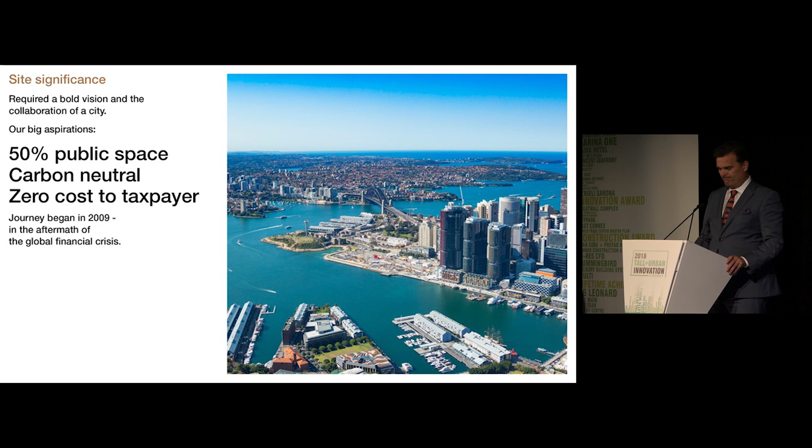We returned 50% of the site to the public. We had to be carbon neutral and deliver the project at no cost to the taxpayer.

International Towers Sydney was a commitment to add 3 million square feet of premium space, 137 floors, a 42% increase to the existing market. We had to create towers that the city would embrace and that would allow businesses and people to thrive. Failure wasn't an option.

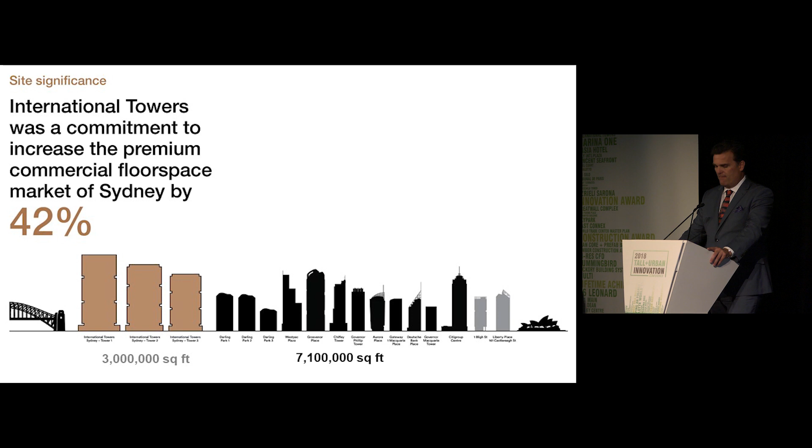So we asked ourselves, how would we succeed? How do we develop buildings that people will thrive in? Quite simply, how do we build one of the most progressive workplaces in the world? We believe the answer to all these questions lay in 4 critical and equally important ingredients: the design, sustainability, community, and culture. I'd like to hand over to Avtar to discuss design.

Thank you, Liam. Our practice has been involved with this site since 2004, the time of the first international competition, as Liam mentioned, in 2009. Lendlease with RSHP won the bid for the southern part of the site. The entire site was formerly a heavily contaminated container port, approximately 54 acres, with 1.4 miles of harbour foreshore.

The Barangaroo South site, shown in red, located near to the CBD core, is approximately 18 acres with a 1,500-foot harbour foreshore and had restricted primary connections to the CBD, was poorly served by public transport.

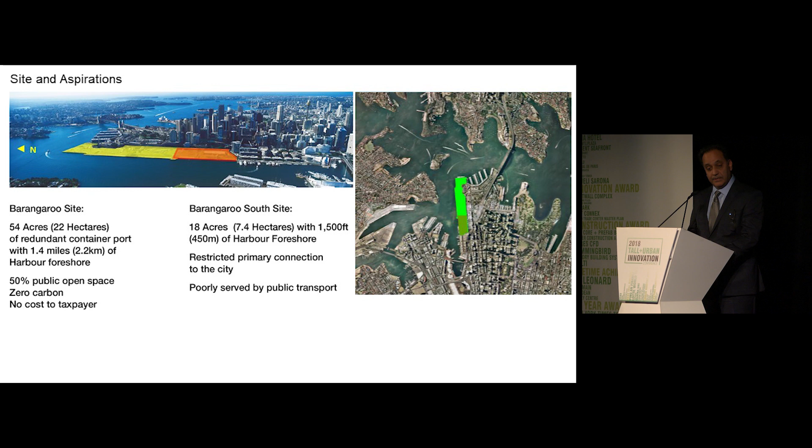The concept arrangement, which evolved over time, for the entire site was to be organised as 3 distinct zones. Barangaroo Reserve in the north, developed as a public park, recreating a headland which used to exist there around about 1836. Barangaroo Central in the middle, where the future cultural and residential content would be located, and Barangaroo South to the south, where the commercial density would be located, the site of the International Towers.

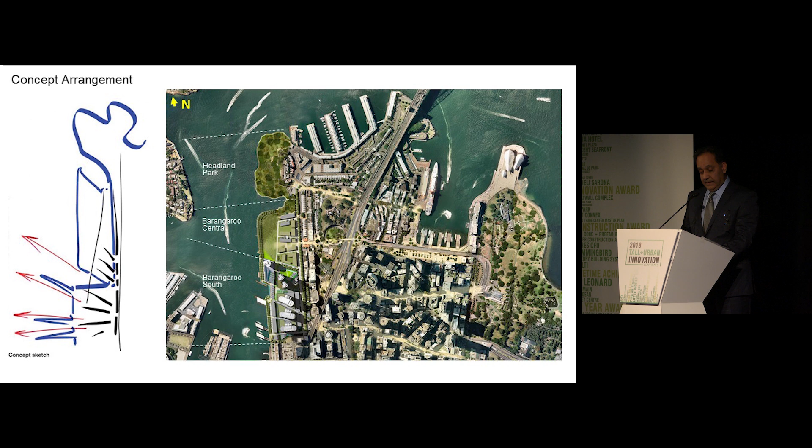The straight edge of the old container port being broken and modified by the introduction of 2 water coves, separating the 3 zones. The requirement for Barangaroo South Towers was to accommodate some 3 million square feet of commercial space.

This site presented a great opportunity to develop large floor plates, an opportunity which is limited within the existing CBD core. The traditional Cartesian city planning grid being explored, its limitations were reduced solar access during the day onto the streets and diminishing waterfront views.

The radial geometry was also explored. This permitted the opening up of solar access and water views and the optimization to maximize both these corridors.

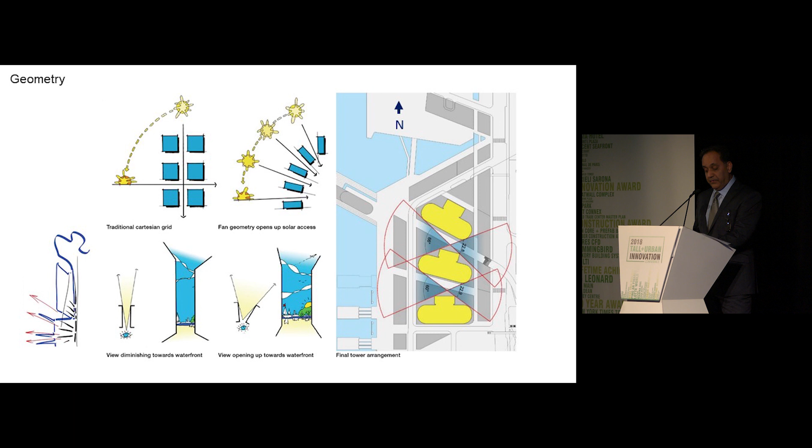The principle of 3 sibling towers being developed, where they could share a common chassis, yet they could develop their own personality. The common chassis elements were the floor plate design, the core arrangements, the expression of the served and servant elements, the needs for solar shading and the harsh Australian climate, and the enclosing facades.

Their personal identities being expressed in differences in height, differences of the rooftop, differences in how they met the ground and the street buildings, differences of the development of their solar shading.

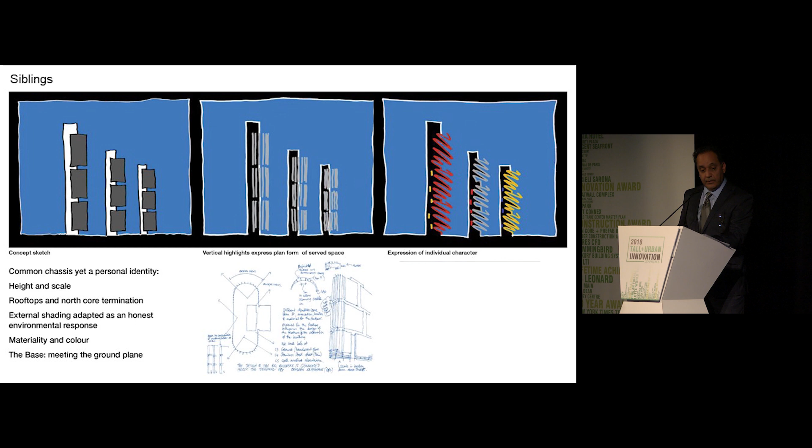The end result begins to illustrate all of the thinking that's gone into expressing the similarities and the differences. The floor plate developed to provide the necessary 25,000 square feet.

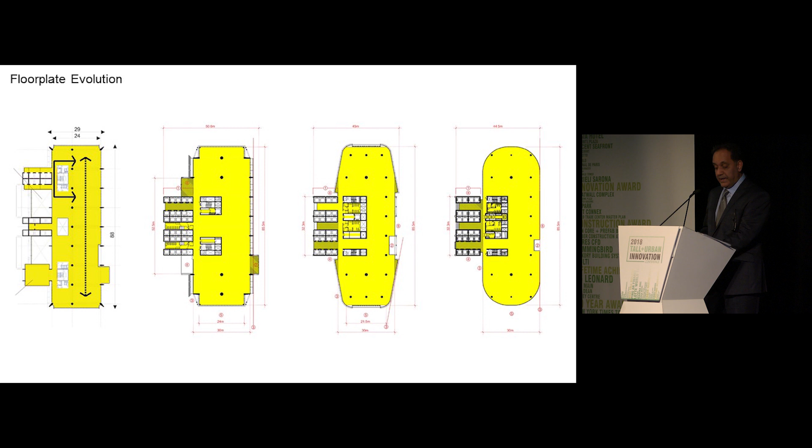The final profile evolved from the influences of the radial geometry, the constraints and the opportunities of maximizing views and solar corridors. Working in unison with the curved floor plate profile, the design of the large vertical shading developed to counter the low east and west sun angles, with the passenger lifts located in the express core, and the service risers, escape stairs, and goods lifts located in the embedded core.

The floor plate structural design provided a column-free perimeter by cantilevering the edges. The structure allowed for soft spots, for interfloor connectivity, with floor-to-floor heights of 12.5 feet on typical floors and 13.75 feet on client floors, allowing general ceiling heights with compact ceiling services and raised access floors throughout. The curved ends permitted panoramic views with no corner offices, therefore providing a democratic floor plate.

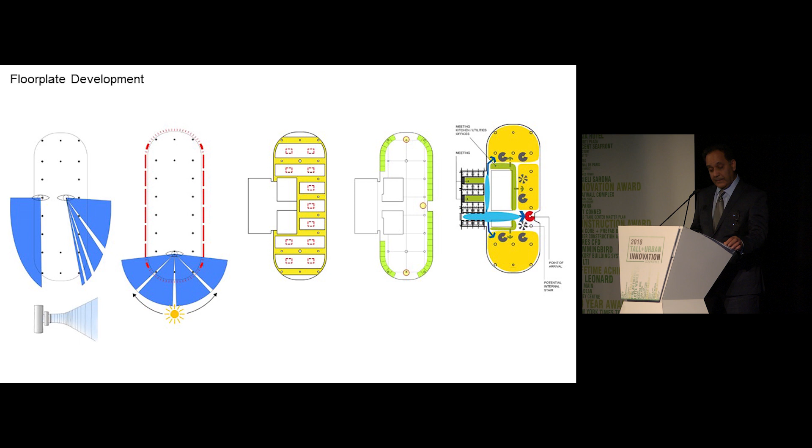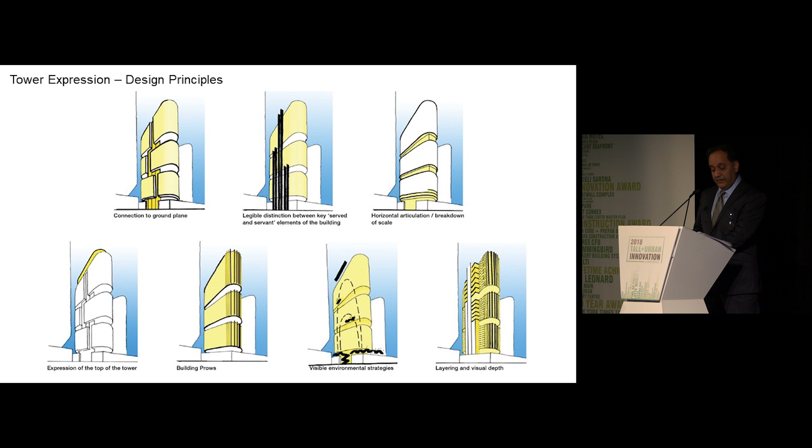The design principles for the external expression of the towers were developed around how they connected to the ground and the street buildings, expression of the core and the floor plates, the introduction of horizontal articulation to break down the vertical scale, articulation of the tower roofs, verticality of the east and west building prows, the visibility of the environmental strategies adopted, and the layering of the visual depth of the elements.

The solar response to each tower developed a range of facade shading that responded to changing solar load throughout the day. Each of the sibling buildings responded to their individual geographic and environmental context, orientation, and overshadowing from their neighbors. The differences bring variety of light and shadow across each of the facades of all the towers.

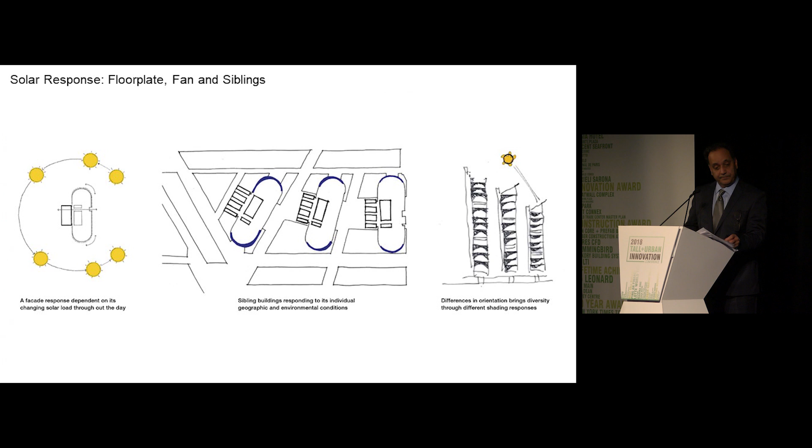The shading of each of the three towers developed in detail to express individuality, varying the materials and colors used, their shaping, and the engineering required to keep them in place.

The Tower 1 solar shading is primarily glass held in a frame to express its crystalline character. Tower 2 solar shading primarily uses simple aluminum tubes held in a frame to express its neutral character. Tower 3 solar shading primarily uses double sheet elements combining vertical and horizontal shading in continuous sinuous forms winding its way down the facade.

The largest vertical shades on the east and west elevations are 6 feet wide. Their support systems and the detailing of their engineering, and how they're put together and what the components are doing, is expressed and highly visible from within the interior spaces.

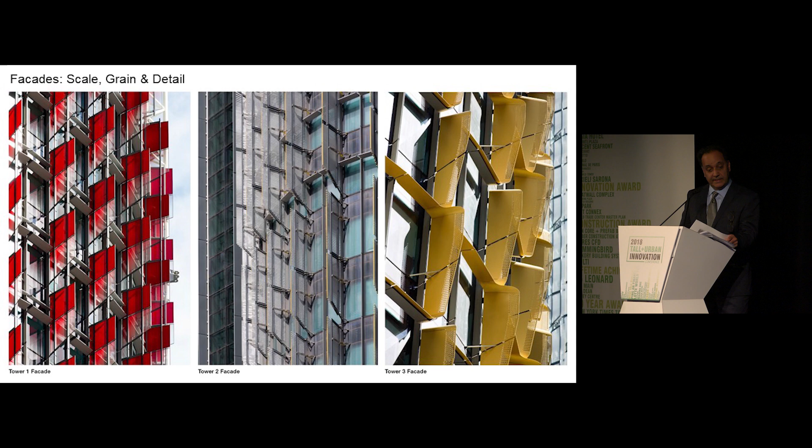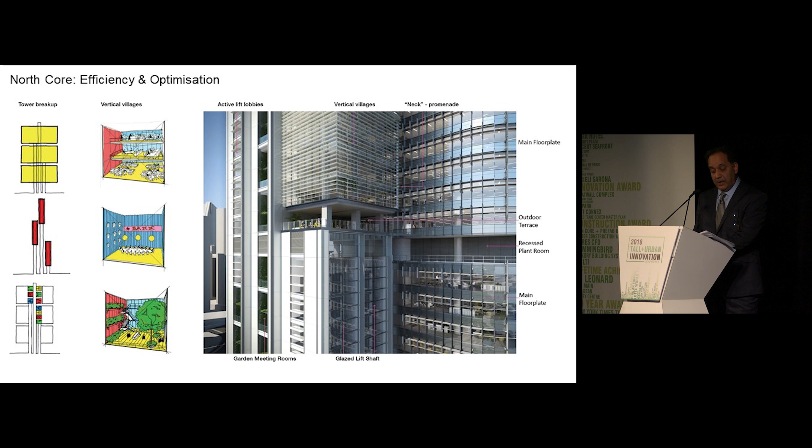The optimization of the north core introduced a series of flexible vertical village spaces which are articulated from and located above the low and mid-rise lift banks. These spaces, connected to the main floor plates, allow further opportunities for vertical connectivity of the floor plates and could be configured in a multitude of ways: single-story, double-story, or triple.

The siblings' measurements are: Tower 1 has 46 occupied levels with around 1.2 million square feet, standing at a height of 690 feet. Tower 2 has 41 occupied levels with over 1 million square feet, standing at a height of 620 feet. Tower 3 has 38 occupied levels with just under 1 million square feet, standing at 560 feet.

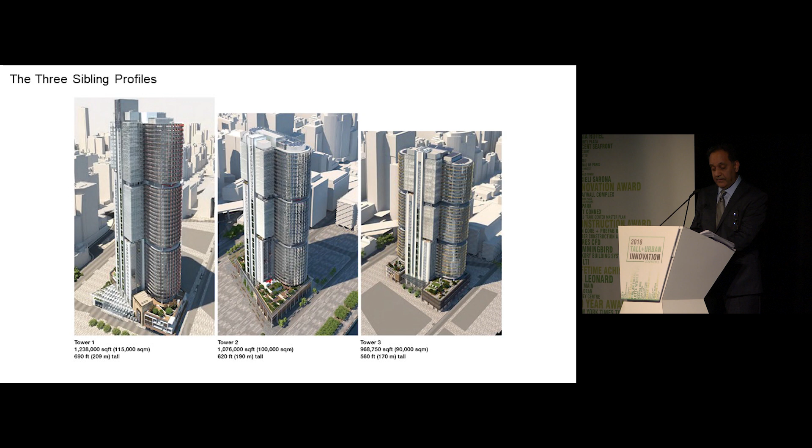With significant commercial floor plates in the precinct being provided on a large floor plate, the importance of the quality of the space becomes critical. The general ceiling heights of 9.5 to 10 feet, with the interfloor connectivity and extensive views out towards the city and water, provided ingredients for the tenants to fully overlay the characters of their respective organizations, creating a diversity of workplaces for their people and their long-term future.

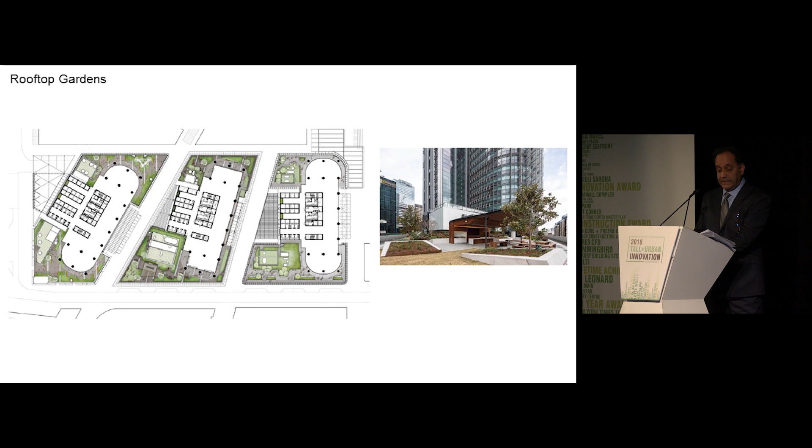The transition floors between tower and street buildings offered great opportunities to incorporate rooftop gardens as physical and visual amenity, as well as opportunities for these to be used as curated workspaces.

The integration of the 6 lobbies within the streets and the finer grain through-site link was achieved by the street finishes taken inside the lobbies and the lobby finishes taken to the outside. The north-south through-site link integrates artist work weaving through streets and the lobbies. The daylighting and sunlighting draw people through the lobbies. The community spaces and tertiary workspaces created the lobby

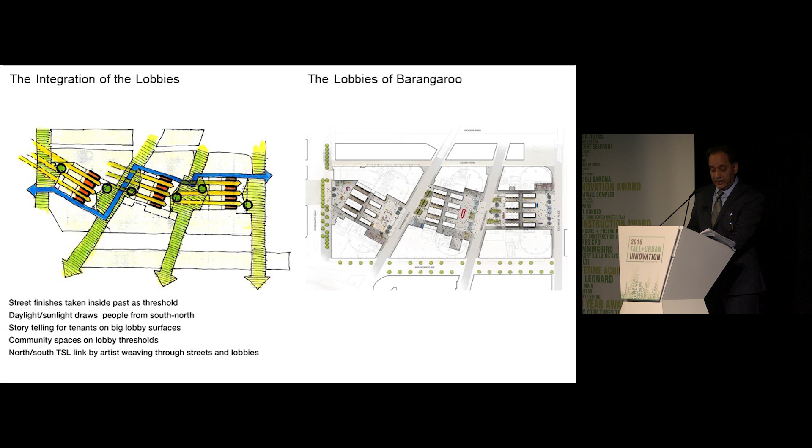street thresholds, incorporating the possibilities of storytelling by the tenants on the big lobby surfaces. This resulted in the breaking down of the barriers between the lobbies and the streets. All of this blurs the boundaries between the commercial private lobby spaces and the public realm of the streets, creating transparency and connectivity

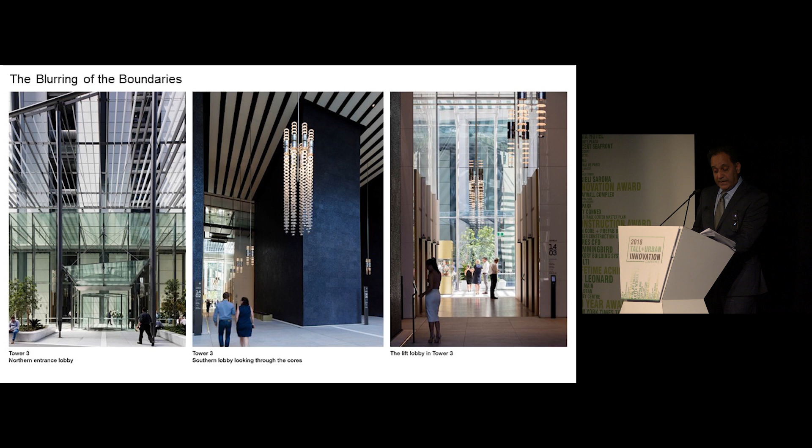between adjacent streets through north and south lobbies of each tower, all creating an open system of movement across the ground plane of the 3 towers.

The vibrant new waterfront city precinct will accommodate 23,000 professionals, 2,000 residents, and over 90 cafes, bars, restaurants, and retail outlets across approximately 5.75 million square feet above ground floor, with an additional 400,000 square feet at basement space.

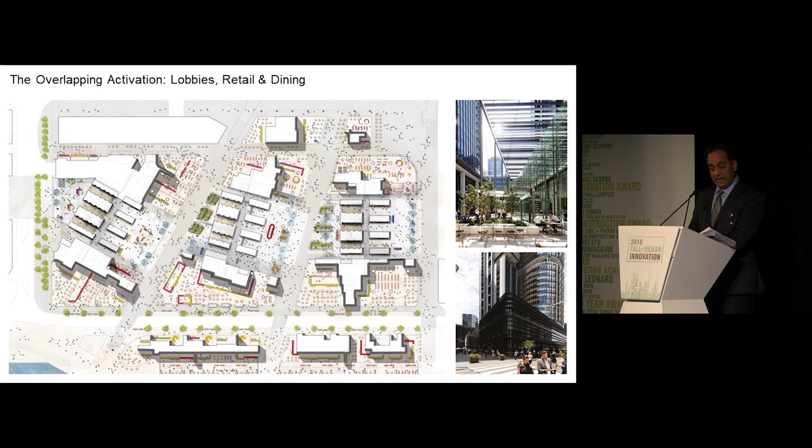The new precinct is now connected to every mode of transport. International Towers is Australia's most accessible workplace.

A precinct which is sustainable, delivering 9 separate development plots on a singular basement, which consolidate all primary servicing and serves all 9 above ground buildings. This singular basement has allowed the pedestrianisation of the public realm and the streets, and has allowed for the aspirational sustainability agenda to be fulfilled, on which I'm going to hand over to Liam to elaborate on.

As Avtar mentioned, everything we do at International Towers was based on sustainability. And for us, that means environmental, social, and economic. This was a unique opportunity to show that an uncompromising commitment to sustainability in all its forms is a solid investment in the long-term viability of a commercial asset and its occupants.

Let's take a look at environmental sustainability. Every design element created through the lens of sustainability. All buildings are the highest rating of a 6-star Green Star.

And recently, International Towers were the first buildings in the world to ever be awarded WELL certification for Core and Shell Platinum level, the highest certification available. This makes International Towers, Sydney, one of the healthiest buildings in the world.

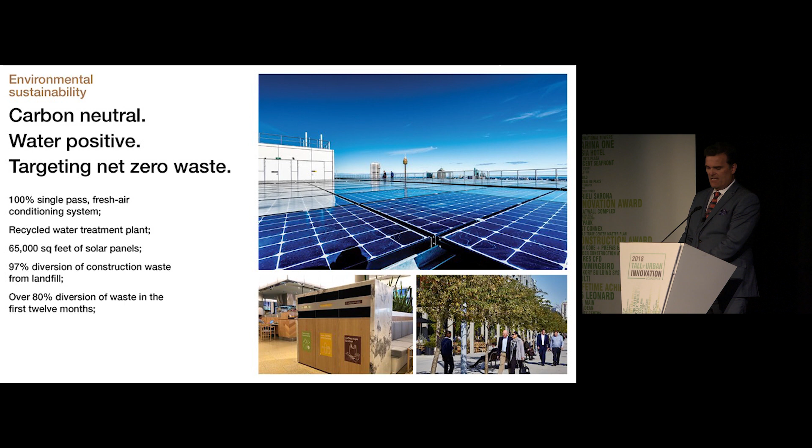There are 65,000 square feet of solar panels on the rooftops of the towers, providing electricity to power all public domain lighting and help power the recycled water plant. There was a 97% diversion of construction waste from landfill.

We delivered a 20% reduction in embodied carbon in the construction process against the typical. We have the largest installation of LED lights in Australia with over 50,000 fittings.

All takeaway food packaging used on site is made from compostable materials, which is then processed with food scraps to create green energy and biofuel. And we house the largest bicycle hub in Australia, with parking for over 1,000 bikes.

We're also striving to set new benchmarks for buildings and workplace when it comes to social sustainability. We employ a very robust procurement policy that guarantees integrity of original design, sustainable and ethical manufacturing, and provenance of materials. We've developed our own training programs for Indigenous youth, providing them with accredited skills training and employment.

We hosted the successful campaign to have marriage equality recognised in Australian law. We're proud to say that all these efforts of working with all levels of government has seen a reciprocal investment in infrastructure to make International Towers the most accessible workplace.

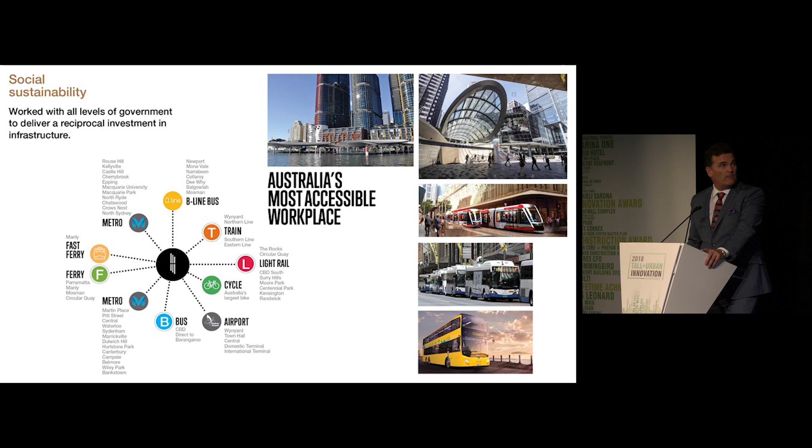Importantly, the economic sustainability of businesses within our towers. Studies around the world predict that between 20 and 40% of jobs that exist today will be vulnerable by 2030 because of disruption. That means the role of workplace is changing dramatically. We felt it was time buildings changed too.

By creating workplaces that allow companies to rapidly expand or contract the size of their teams, therefore their workspace requirements as well, we've removed a major impediment to their ability to make long-term lease decisions.

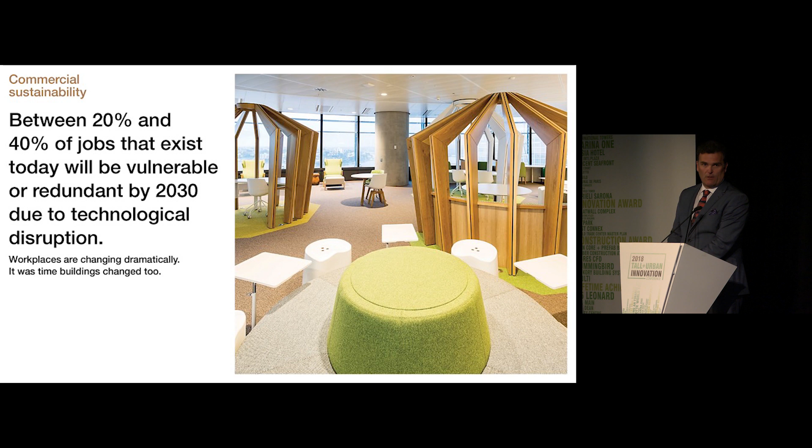Within the towers, we've designed smaller, uniquely flexible open floor workspaces and shared community spaces that create positive collisions and collaboration both within and across organisations. This creates opportunities for smaller organisations, such as startups, to join our community, which is increasing our tenant diversity and embracing the vibrancy and vitality of our community, protecting it against future disruption.

This model has many benefits. They're able to expand operations quickly and cost-effectively with minimal disruption. They're able to attract and retain the best talent, and they report greatly reduced absenteeism and improved employee wellness.

Our third ingredient, community. It's been said, people ignore design that ignores people. Shouldn't a great building be judged not only on the beauty of its structure, but by the magic of what happens inside it each day?

To make sure we could create an extraordinary environment for business success, we had to ensure that each tenant shared the same values. Our groundbreaking approach to curating the building tenancies has ensured the towers are inhabited by a highly diverse community of businesses that share aligned values, a commitment to innovation, sustainability and collaboration.

They are part of a larger community of progressive organisations, each at the top of their game and eager to share their expertise to create those unexpected opportunities.